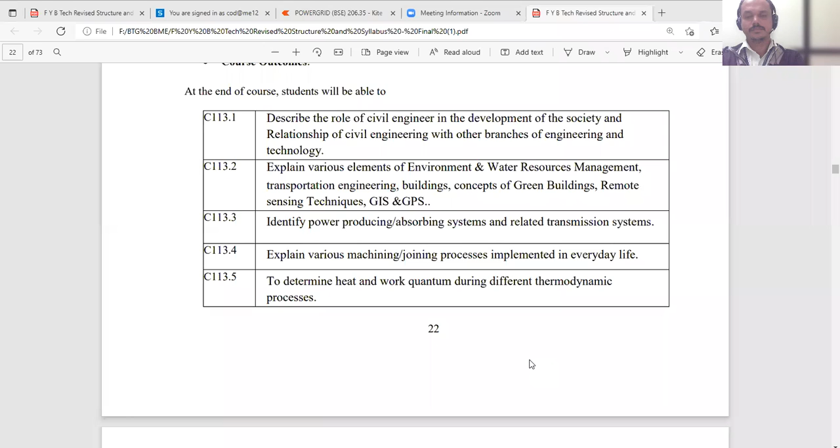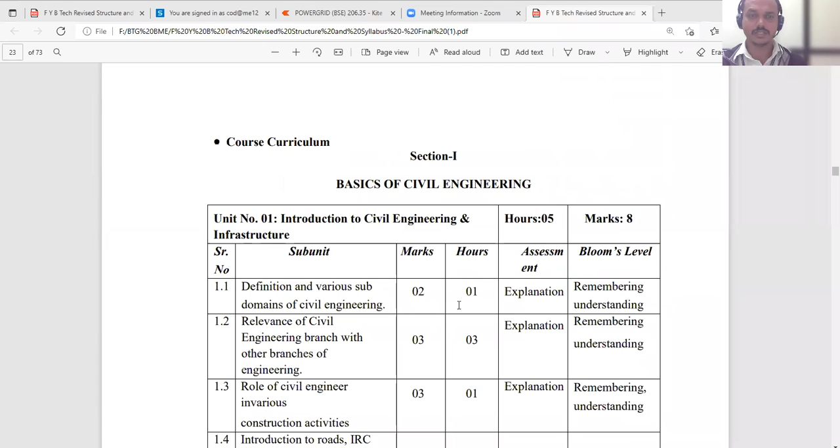So they are going to introduce thermal engineering. Where is it - design engineering, production engineering, and thermal engineering - these are the streamlines in mechanical engineering. With this subject, we are going to introduce these streamlines. Now our syllabus is in section second; section first is basic civil engineering, and section second is basics of mechanical engineering.

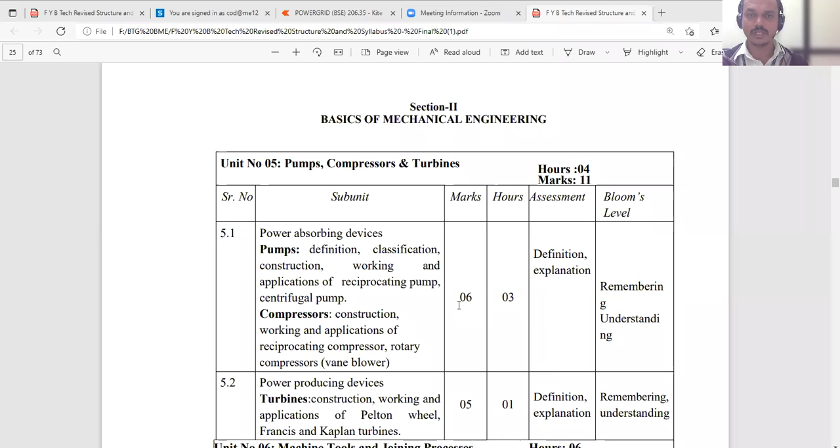I think you have already written the name. Please repeat the last course outcome.

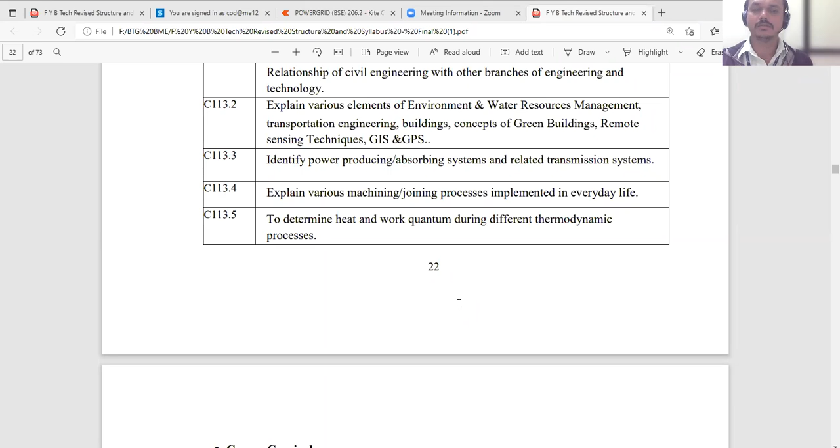Write down the third one: to determine heat and work quantum during different thermodynamic processes. Done, sir. Okay.

Okay, section second, basics of mechanical engineering. In that, write down unit number 1. Actually it is unit number 5, but as per our syllabus it is unit number 1; if you write unit number 5, that's also okay. So unit number 1: pumps, compressors, and turbines. This chapter has a weightage of 11 marks in the final examination.

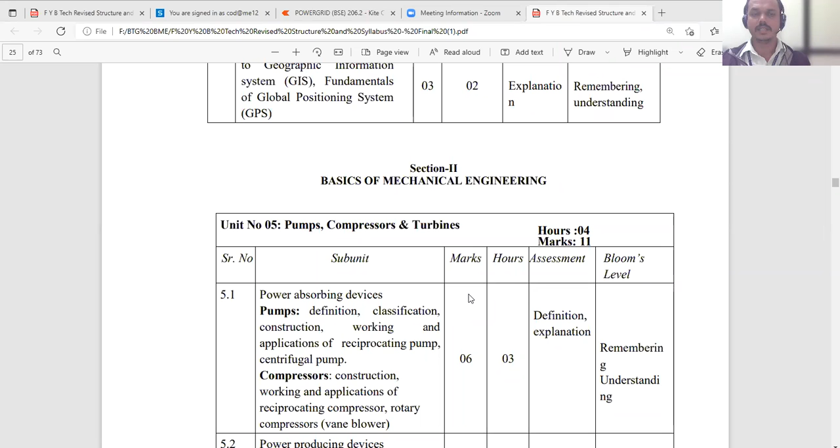In that, write down 1.1 or 5.1, power absorbing devices, pumps. In that, first one is pumps dash...

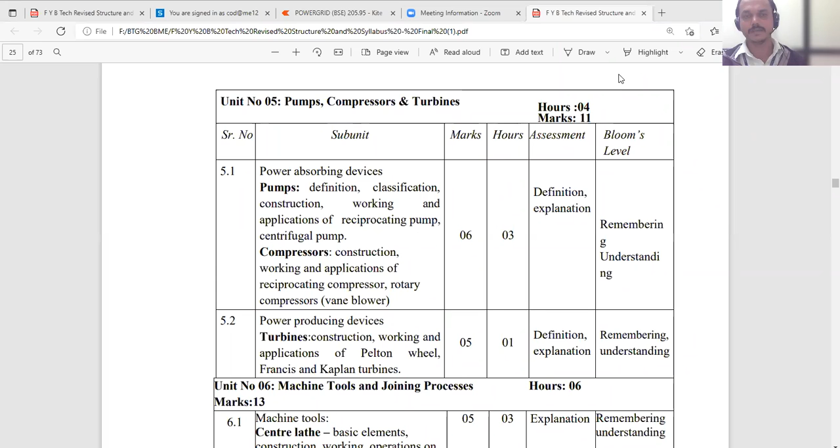So this one is the first chapter. Then second, machine tools and joining processes. Machine tools and joining processes. Write down, 13 marks.

13 marks in that first point.

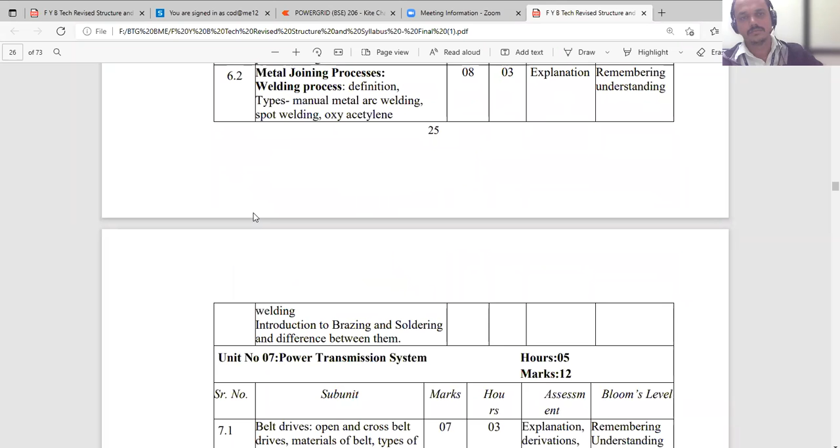So under metal joining process, write down welding process. First process is the welding process. This welding process is mainly used to join heavy metals, steel bars, or some sheet metals.

So in that welding process, write: definition, then types - manual metal arc welding.

I think all of you have seen this manual metal arc welding. There's a red box which is used to control the power. One earthing is required where we have to perform this operation, where we have to join two metals. We have to give one earthing, and as we touch that rod on the joint, the circuit completes and heat is generated at that point, and that metal and rod are melted and fixed at that point.

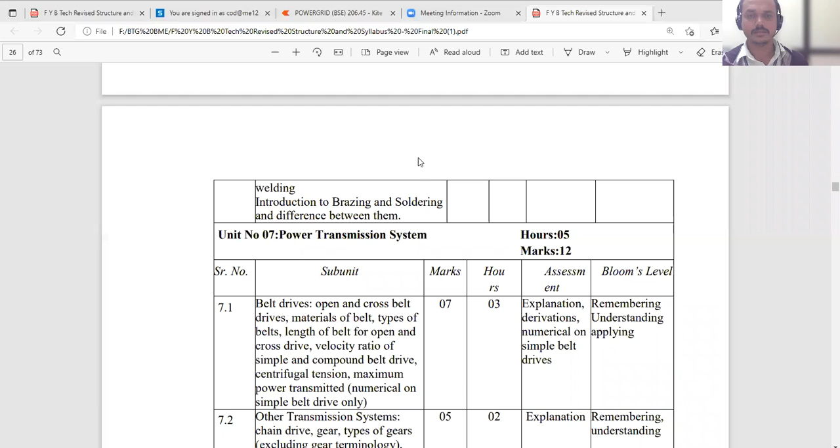Soldering is important for ENTC also. A circuit is there, and on that circuit we have to join all the wires, condensers, conductors, and all these things, along with the difference between them. This point carries a weightage of 8 marks.

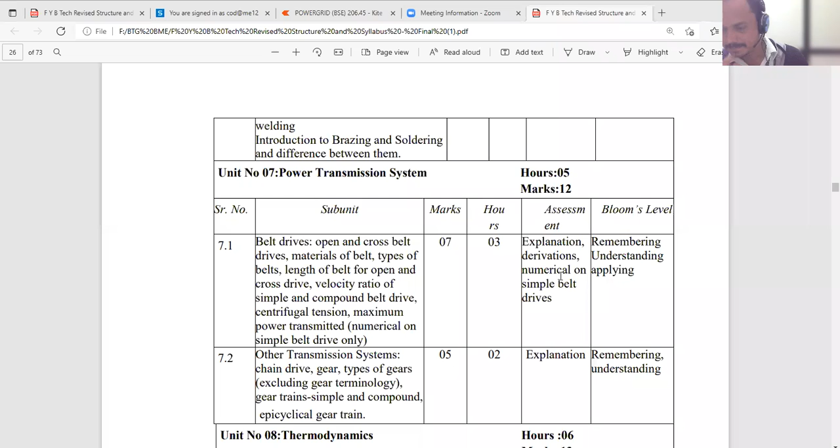Okay, so our time is ending here, so we will stop here today. In the next lecture we will see the remaining 2 chapters of the syllabus.

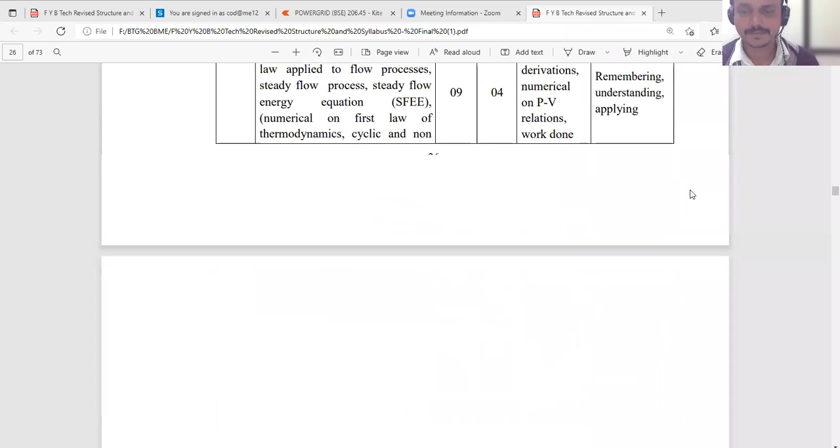Do you have any doubt? I think no one has any doubt. If you have any doubt, please ask me. I already told you that.